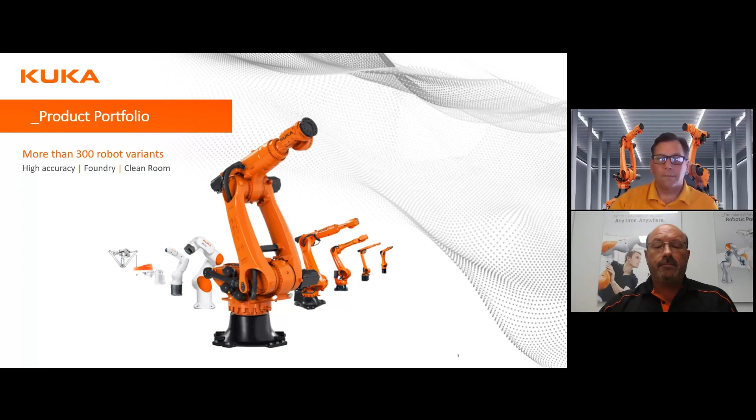In addition to robot arms, auxiliary equipment can be used to help give robots additional reach and flexibility to reorient the parts being worked on. This equipment comes in the form of linear units and rotational positioners. Examples of this equipment will be seen throughout today's webinar, giving you a sense of how it helps expand the functionality of the robot when working with machine tools.

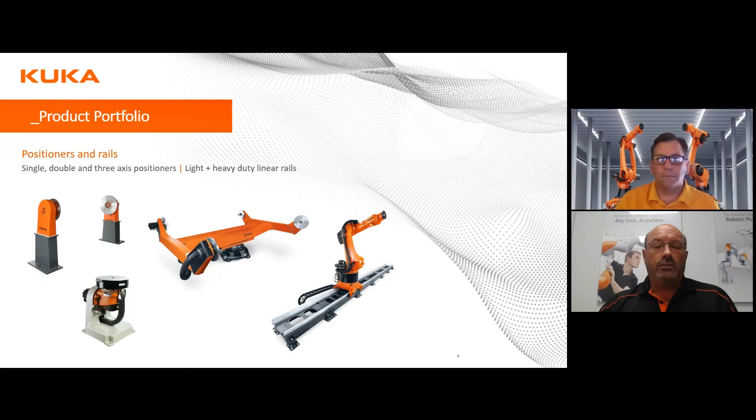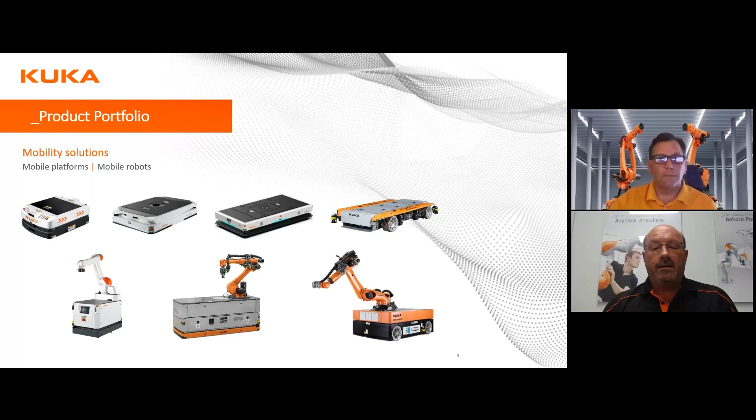Another technology that has really been coming into its own over the past several years is mobility. When it comes to mobility, there are many configurations available in the market today. Mobile solutions from KUKA offer various sizes and payloads to choose from, as well as drive and navigation systems. Moreover, the addition of industrial and collaborative robots on top of these mobile platforms opens up additional use cases to expand the reach and flexibility of automation in the machine shop. Again, you'll see examples of these systems later on.

This brings us to the first of three poll questions for today's webinar. I'll give this some time for everyone to answer. What we're asking is: are you intending to add robotic automation to your machining operations in the next 6 to 12 months?

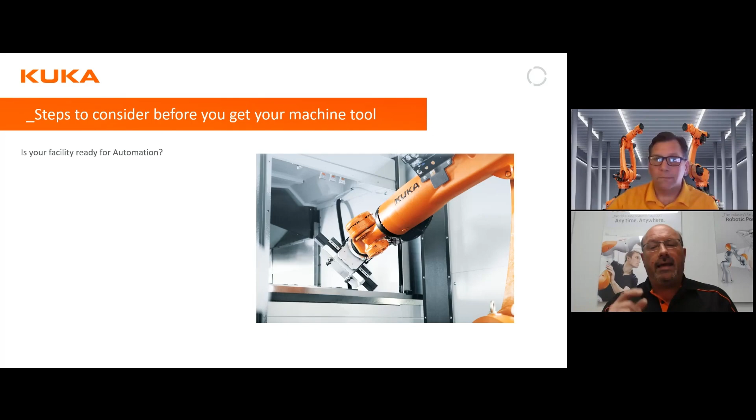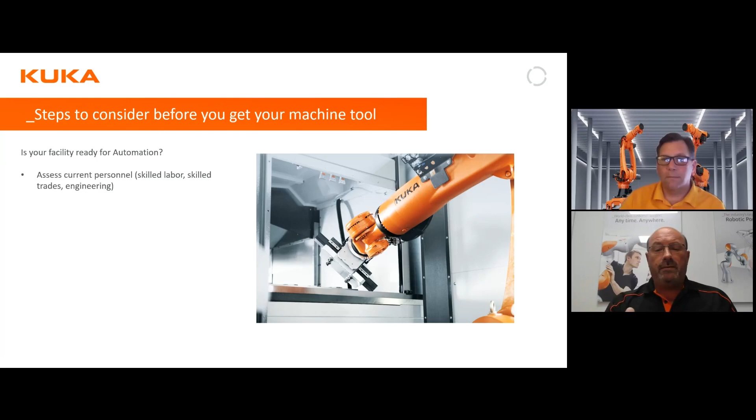Moving along, let's start the discussion around steps to consider before you even get your machine tool, with the question of readiness. Is your facility ready for automation as it applies to your employees? A good place to start is by assessing the current skills of your labor, trades, and engineering teams. Do they have experience working with advanced machinery like robots? This includes jogging and programming the robot, troubleshooting and repairing electrical control equipment, and repairing or replacing mechanical tooling.

This may uncover a skills gap that can be solved with training your existing employees or hiring new employees with the skills needed.

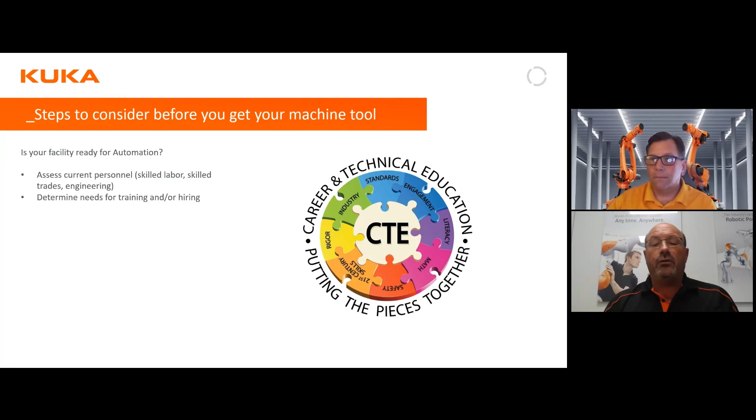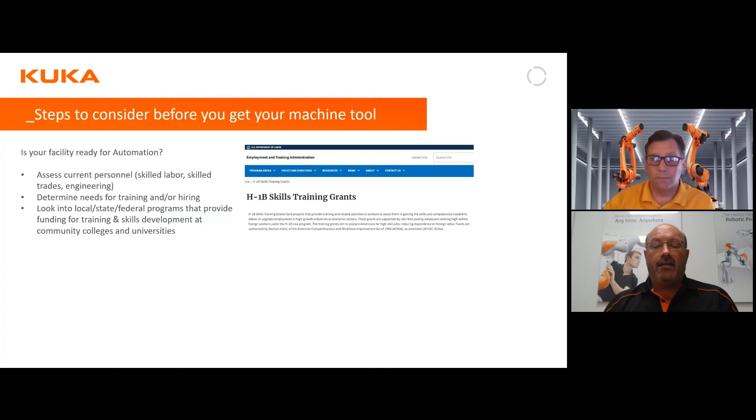When it comes to training, there seems to be no shortage of funds and programs available at the local, state, and federal levels. If you do a quick Google search, you'll see a lot of wins happening for training programs funded by different levels of government. Training programs are offered by both local community colleges and robot OEMs. KUKA offers such training through its KUKA College facilities in Michigan and South Carolina.

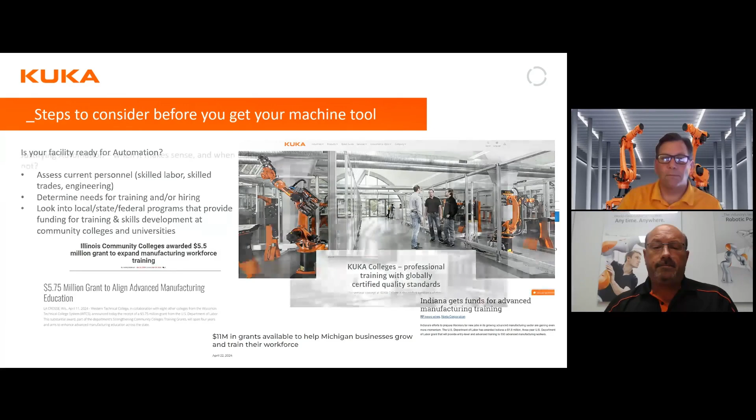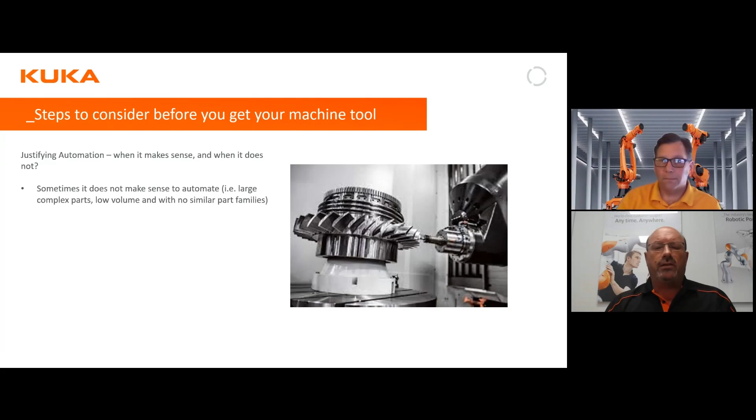As you look at opportunities for automating your new machine tool, it's important to understand not only the total cost of the equipment, but the impact automation has on your operations, and whether it's even appropriate to look at automation. If your parts are large and complex with very long machining times, or have low volumes, or you don't have families of parts that can share the use of the automation equipment, automation probably won't be a wise business decision.

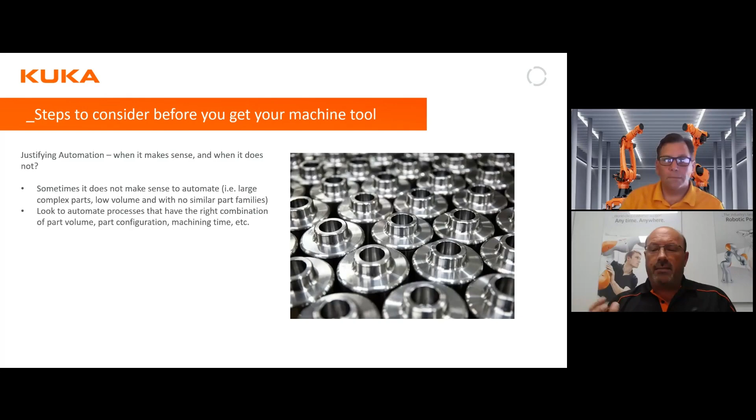If, however, you have parts that have high volumes or families of parts that are generally similar in shape and configuration, and your machine cycle time aligns well with having a robot, automation might be right for you.

So if it's your first time automating, my recommendation is to start off simple. Look for an easy first win—automating parts that are relatively simple to machine, feed, and handle by the robot, overall easy to process. If you take this approach, you may find there's a standard solution in the market that can be readily tailored to your needs. Standard solutions tend to be quicker in terms of delivery, cost competitive, and have value-added software and hardware features developed and honed over several iterations.

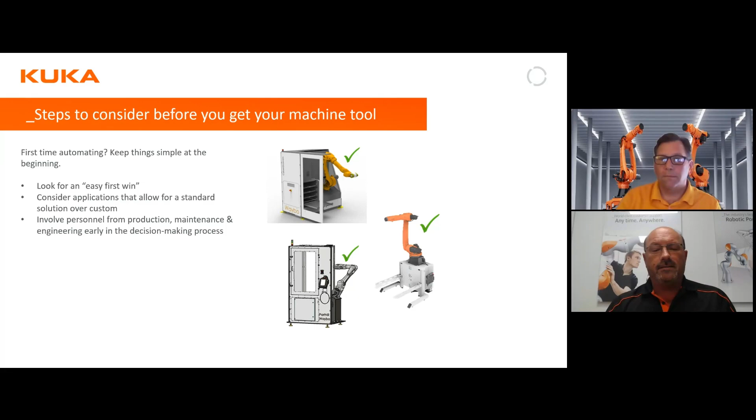A major part of being successful with your automation is to involve your team, the team that will support and maintain the equipment once it's on your floor. Once you have success automating some of the easier applications, you might want to venture into more complex applications like 3D bin picking, if the justification warrants it.

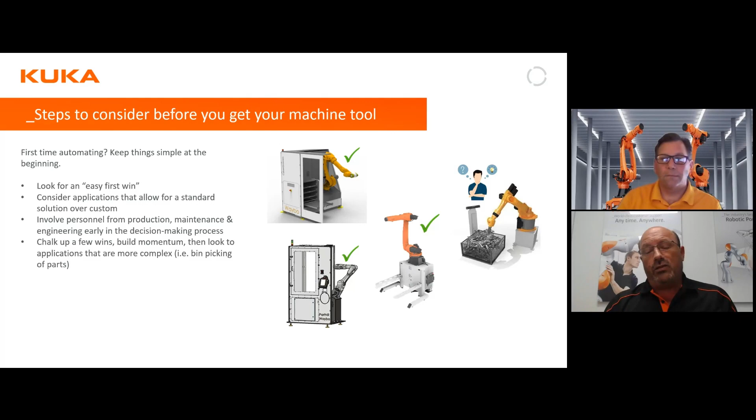So you're moving along in your journey into automating your machine tool and generally understand the financial commitment it will entail. Have you considered other ways to maximize profitability from your automation? Can you put the robot to use on tasks other than loading and unloading the machine tool? Can the robot perform a deburring operation, drill out a simple hole, face mill a non-critical feature, perform some type of inspection, or package the parts?

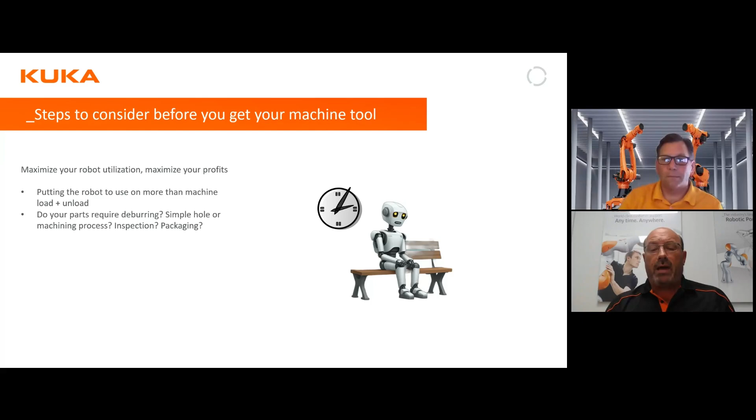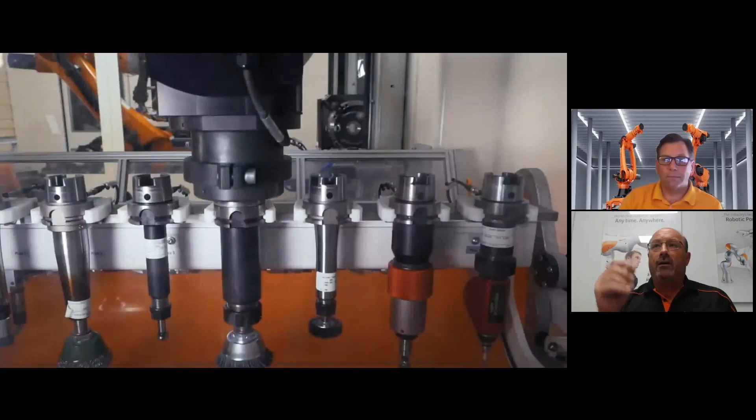This video shows a fairly complex system overall, but you're seeing how the larger robot is putting to use deburring tools to help do some post-processing after the operations. You're actually getting a sneak peek into the manufacturing and machining of castings that go into our very own robots.

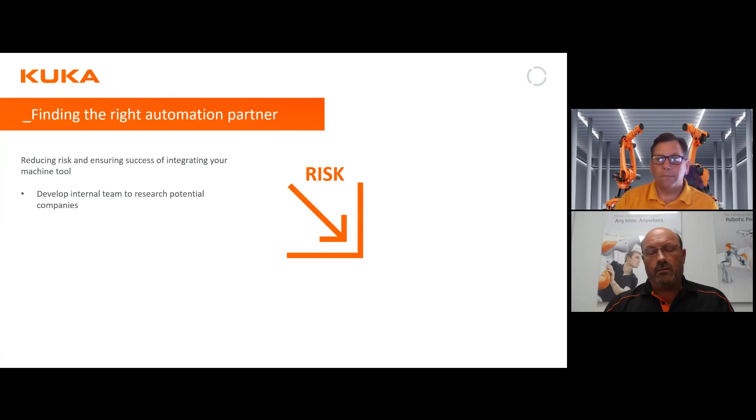Another approach is to work with your robot OEM to help recommend an automation supplier. Companies like KUKA have partner programs that can help you narrow down the field and ensure you're aligned with the correct automation partner. You want to make sure you bring the right project to the right partner.

If the project's $200,000, give or take, a large integrator that typically works on projects at the $3 million level might not be a good match. And if you're looking at automating a multi-robot project with several machining operations, part transfers, inspection stations, it can easily overwhelm a smaller company. So it's really important to engage with the right partner for your specific project.

Another approach is to look for advice from your network in the industry. Find out who's had success with the companies you're researching and learn from their story.

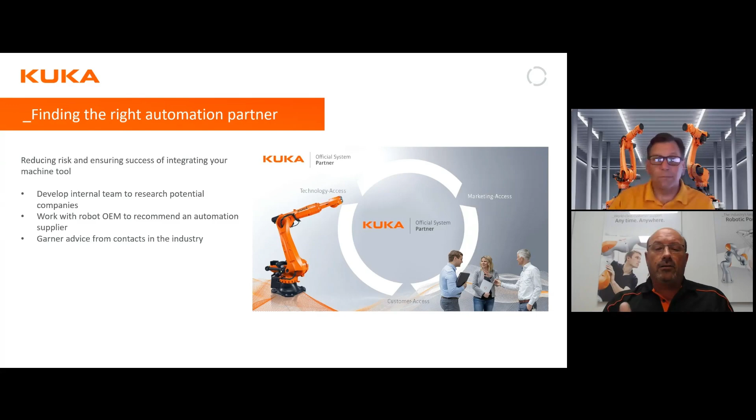So now you have the specifications for your project, and you have a list of potential automation partners. Here are some next steps to take.

My first recommendation is to visit the facility of the automation partner you're considering. This will give you a chance to tour their facilities, meet with their teams, and see how they operate, starting from reception, extending out to the plant floor, and everything in between. Are they well organized? Do they have a good process flow? Do they have a shop full of equipment, or is it waiting for the next project to show up? You'll gain a lot of insight with a visit.

Another visit that will benefit you is to tour a facility that's running a system from your potential automation partner. This will allow you to see firsthand how their equipment operates, how the people at that facility interface with it, and what their feedback is on the equipment that was sold and integrated by that partner. This might not be the easiest to get set up - it's hard to maybe get into the competition - but if you can make it happen, I highly recommend that you do it.

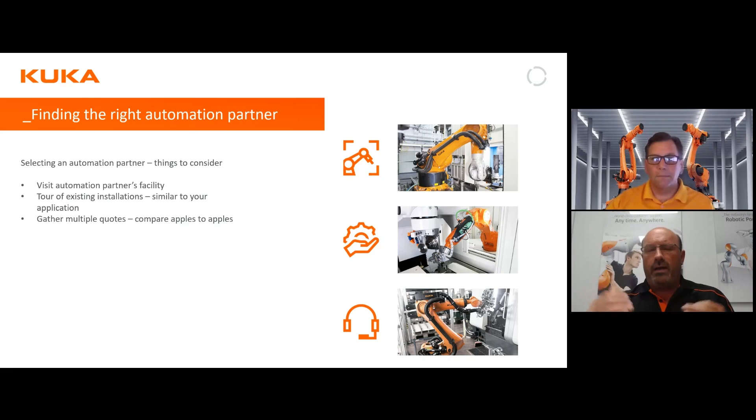So now that you've identified 2 or 3 companies that check all the boxes on your requirements, you've assessed their facilities, you've seen their equipment in action, and provided them with the same specifications and expectations for your automation project, you want to request a few quotes, approach 2 to 3 companies, and ensure you're comparing apples to apples. Make sure all the features in one quotation match pretty much verbatim with the other quotation. That way you can assess based on deliverables, based on pricing, and make an informed decision.

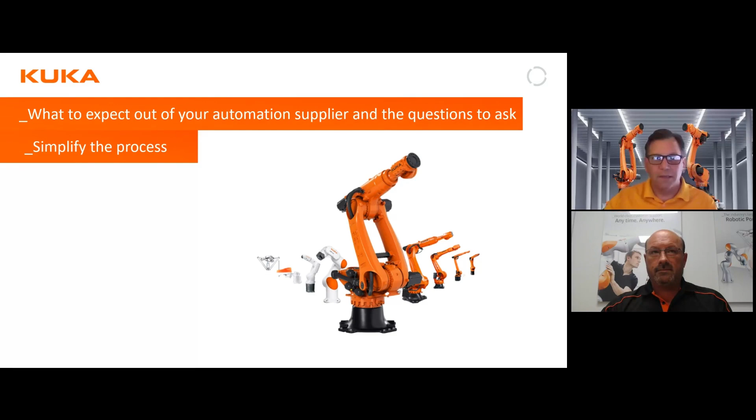Communication issues, the root of all evil and the cause of a lot of issues. Whether it's people or machines, the issues are the same. If you can't exchange information, whether it's bits, bytes, or words, you won't be making any parts.

Field bus networks can definitely reduce your wiring costs for both safety and data networks. The wiring can be as simple as plugging in an Ethernet cable, for example.

You really want to evaluate the cost and lead time of options versus your needs. Sometimes discrete I/O, hardwired connections for data and for safety, could be the most cost effective. For some large projects where you have a lot of wiring and a lot of data exchange, they may be better suited for safety and field bus networks.

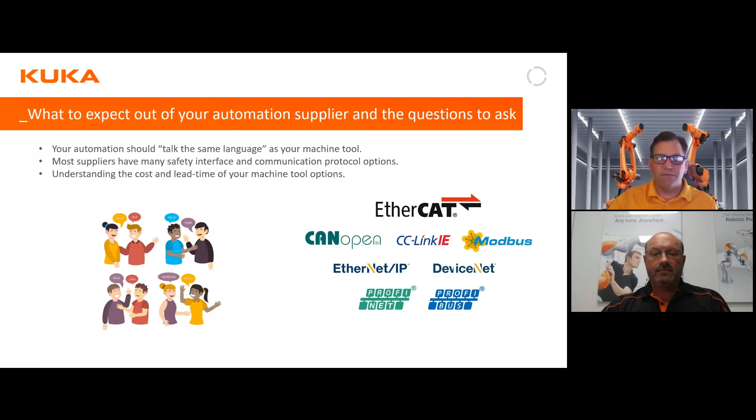I know future production needs aren't always known, but it's always worth having a discussion early on. Adapting tooling and grippers for future parts can definitely save some money, and spending a little money up front can save you a lot of money in the long run.

Sometimes small gripper changes can cost very little, but may allow you to pick up many different types of parts or a family of parts, as an example. A complete new gripper design can be pretty costly after the startup. Another option to give you some flexibility is to add tool changers, so you can quickly change grippers for new parts.

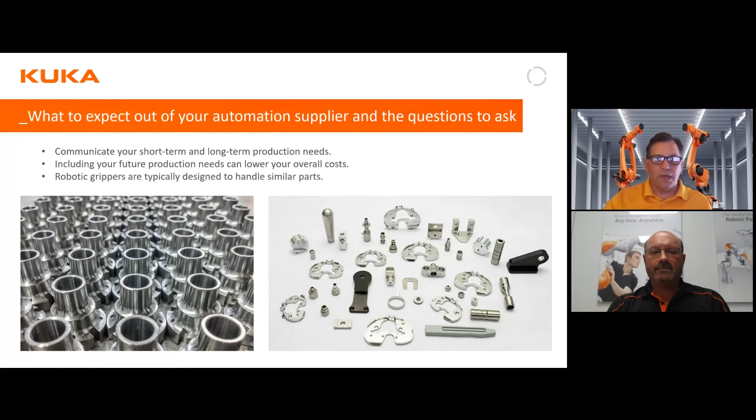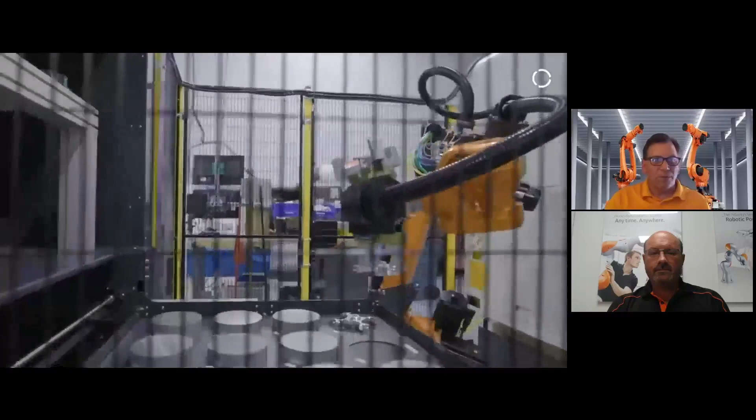Here's an application video. The first one is showing a dual gripper design, and this design will handle both the raw material and the finished parts coming out of your machine tool. So it's a very efficient tool and it saves cycle time.

The second video is going to show a single gripper that can handle different size parts, but they are of similar type or similar part family. This could be a very cost-effective solution if you don't have tight cycle time requirements.

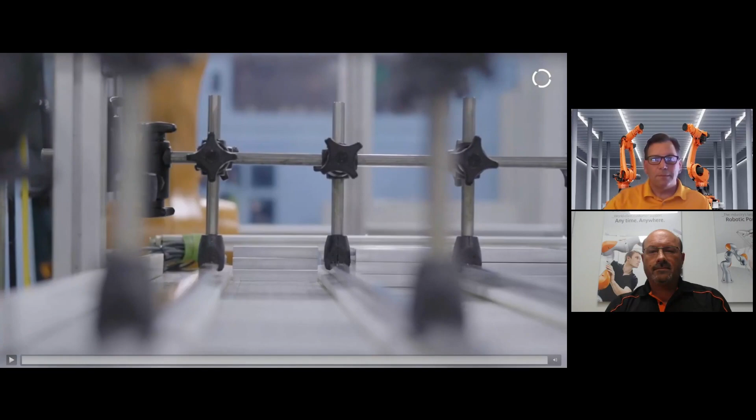Custom automation typically costs 50% more versus standard automation. But of course, every project can be a little different and the cost can vary a lot too.

A standard system is really a pre-engineered solution that requires very little changes to meet your requirements for the project. One of the biggest advantages is it's a proven, tested solution, typically has lower costs since there's no major engineering required, and these systems can be turnkey as cheap as $75,000. The biggest disadvantage is they're really not very flexible and they might not fit your layout.

A custom solution typically handles multiple processes. It can be integrated into your machine tool directly, or it might be part of a large production line. The main advantage is it's a very flexible solution and you get exactly what you need.

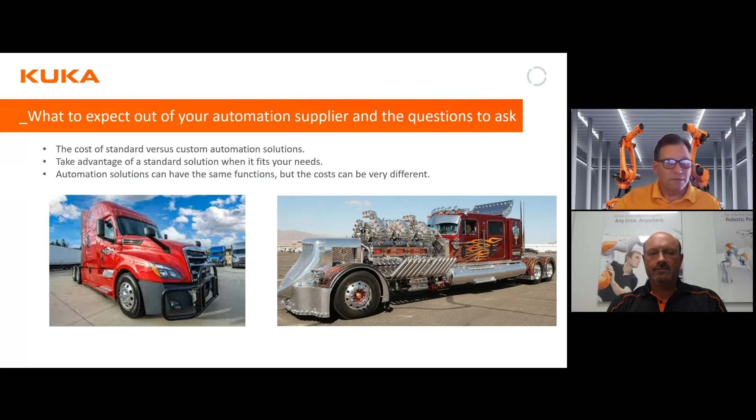You really want to spend your budget when needed, but don't spend your money on the cool stuff that won't help your production. Both of these trucks can really do the same job, but one would obviously cost a lot more than the other. Although I do like the custom truck a lot more.

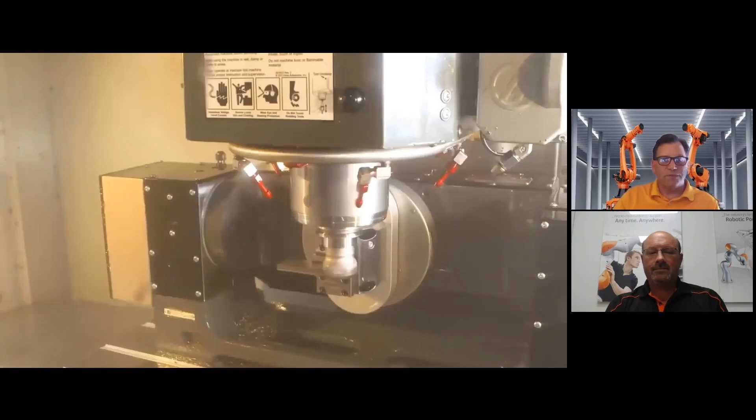Here's an example of a standard system. This again is a pre-engineered solution. It's a very simple approach for both the part handling and the gripper design.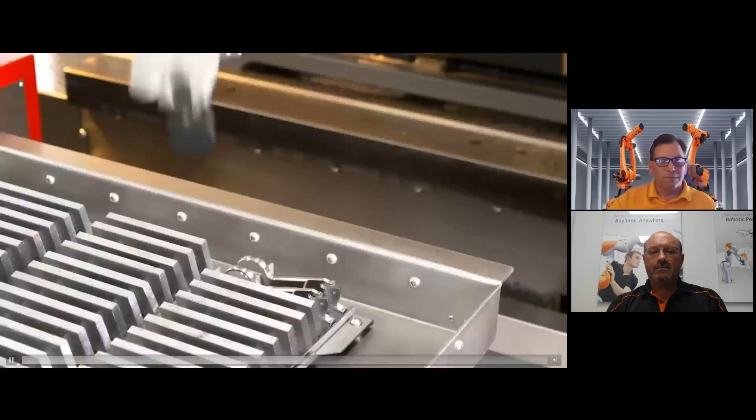The system can be easily retrofitted to an existing machine tool. Again, a very simple design and typically a very quick return on investment. The only custom parts of this system would be the tray handling for your incoming parts, and then the custom gripper or fingers to handle the parts.

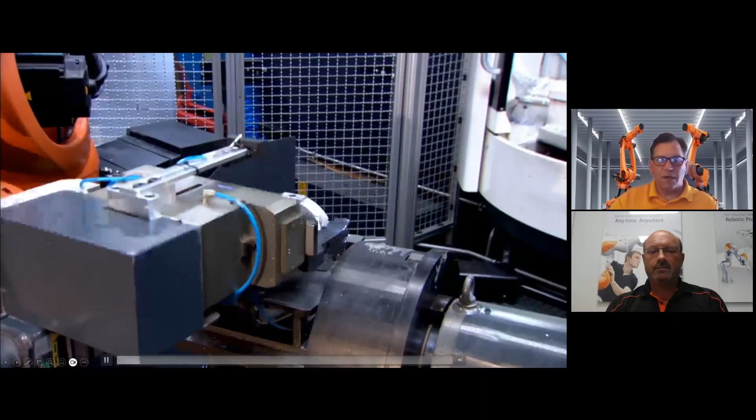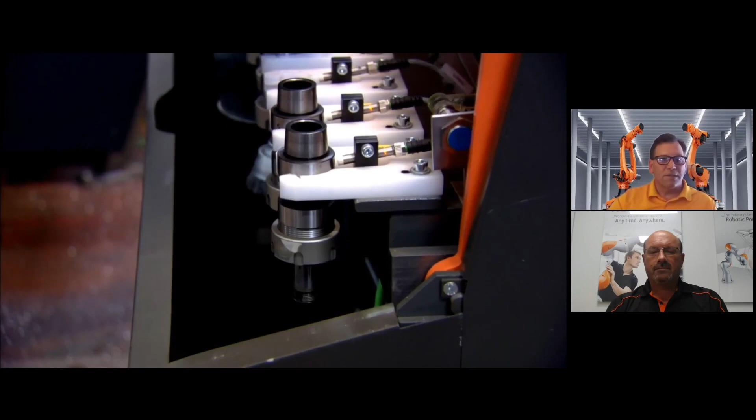Here's an example of a custom solution. This is in our robot production line, as we say, robots making robots. This system was custom built to integrate seamlessly with the machine tool and to handle multiple secondary processes. Robots will never replace a machine tool, but they can certainly complement them and save you money.

Drilling, tapping, milling are all possible for features that don't have tight tolerances. For example, if you're in the range of 10 thou to 20 thou for your part tolerance, that's in the range for robotic processing.

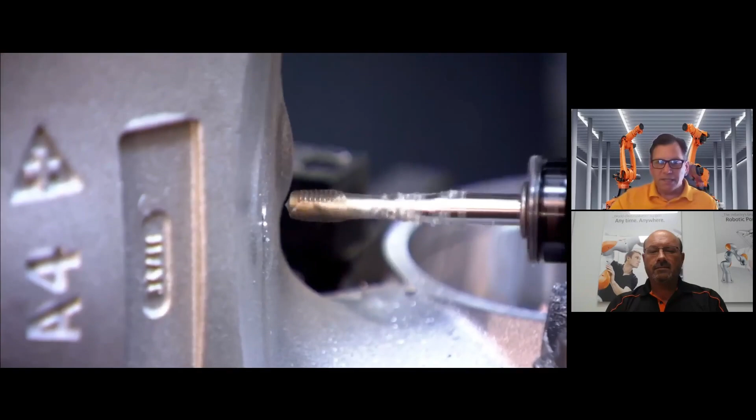There are many different solutions available for handling parts, and the cost can vary a lot. Conveyors, tray systems, vibratory bowl feeders, 2D and 3D vision guided robotics are some examples. Complex parts typically require complex solutions and higher cost feeding systems.

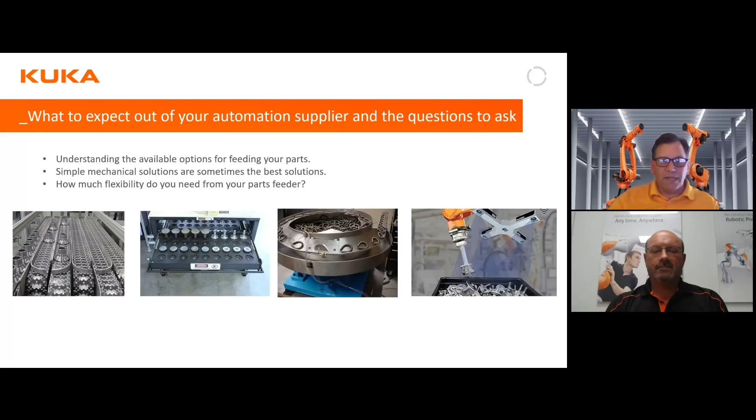Simple mechanical solutions can have a big advantage versus high tech. Keep it simple if possible. Now, 2D or 3D vision is definitely a great option if you really need it. My advice would be to take advantage of the experience of your automation supplier and evaluate all options available.

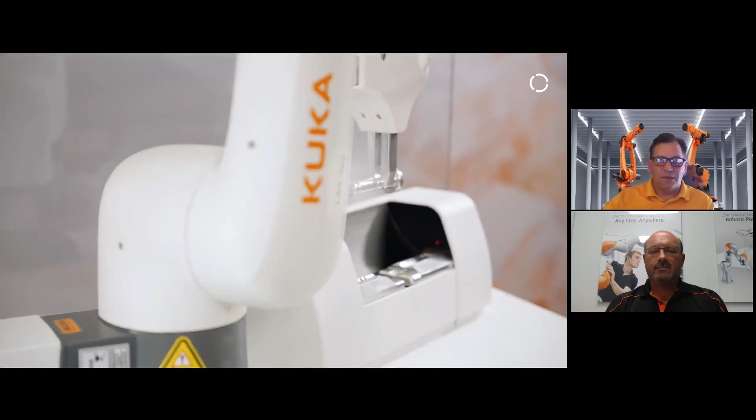Here's an application video. This is showing 3D vision to pick complex parts directly from an unorganized parts bin. This particular application uses a collaborative robot with a dual gripper design.

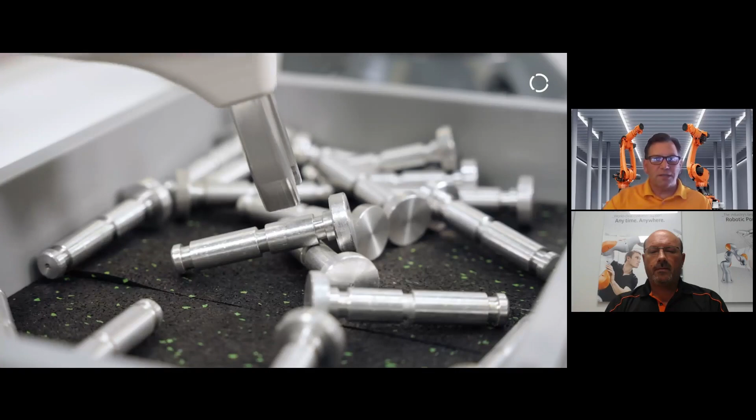These systems are pretty sophisticated. The software can automatically figure out the pick strategy and select a collision-free path to and from the parts bin. You really get a lot more for your money today, and tech suppliers continue to lower the cost and add more features to this technology.

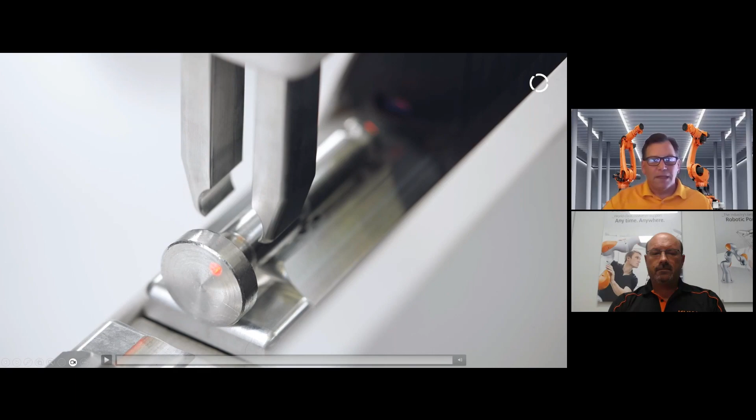As with a lot of industries, AI is quickly becoming a game changer. Sometimes there's no need to train a part. The system can automatically identify a new part and come up with a pick strategy. You want to make sure your automation supplier explains in detail what is needed before making chips and what they expect out of your team.

Identifying critical path, or high-risk tasks, is always important, and it's always good to have a plan B.

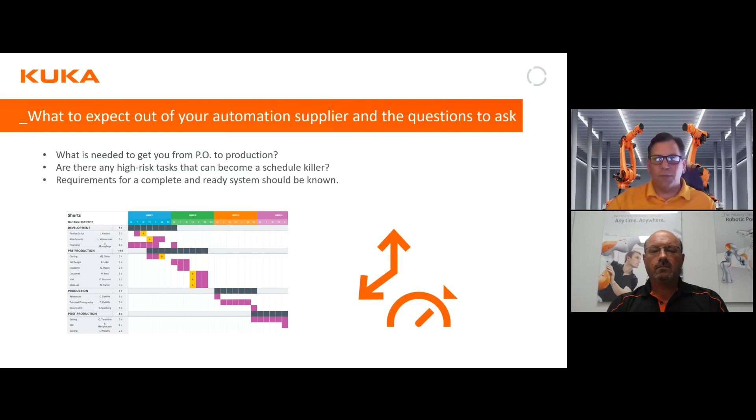FAT, or factory acceptance test, this should really be part of your proposal and agree on it before issuing a PO. It could definitely save you a lot of headaches.

If it's a turnkey system, it may include a complete design, install, training, programming your first parts, for example. Most suppliers are pretty flexible on what they can offer, and the deliverables from your automation suppliers can vary depending on their capabilities and your needs.

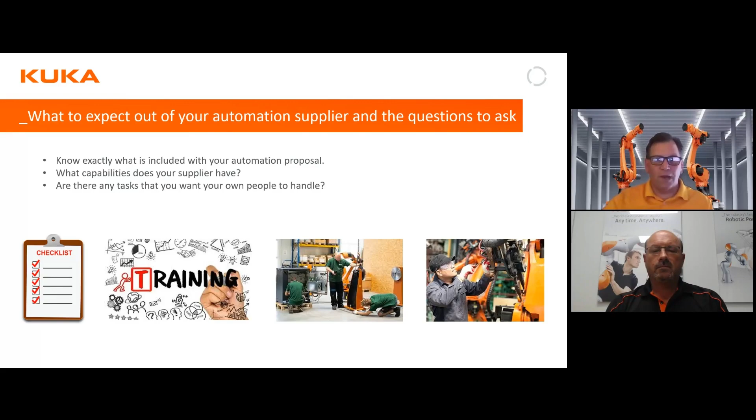The best way to learn a system is actually to help install, start up, and debug the automation. Including your people early on in the process can be critical.

I've seen many projects fail when it really isn't possible to automate 100% of the process. A successful project is really a project that has a good return on investment and you achieve your production needs. The best automation solution is really useless if it doesn't fit your budget.

Sometimes you want to take advantage of your skilled labor if possible. It's still pretty difficult to duplicate what the human hand and eye can do.

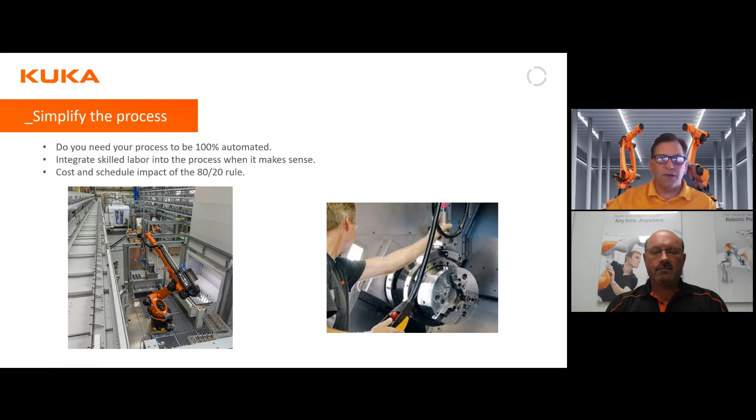The 80-20 rule definitely applies to automation. I've seen many applications where 80% of the tasks are completed with 20% of the budget, and the last 20%, the very difficult tasks, might consume 80% of your budget. So you really want to prioritize your costs versus needs. There are definitely a lot of variables to consider, and every automation project can be a little different.

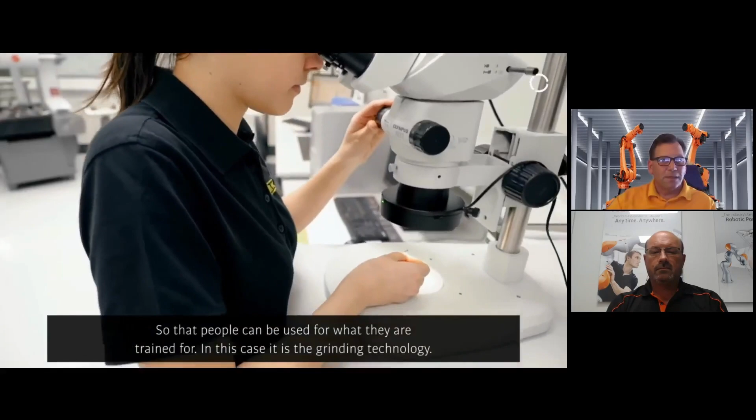Here's an application showing loading and unloading of cutter inserts into a grinding machine. In this case, the robot handles all of the simple tasks that are easy to automate.

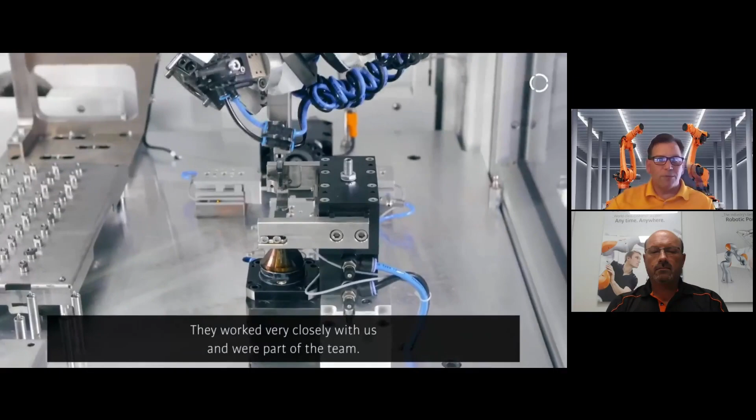I understand there are some really good automated inspection systems out there, but this particular customer determined that a human was needed to inspect the cutters. The reality is, the machine tool and the automation are still making the customer money, so everybody's happy.

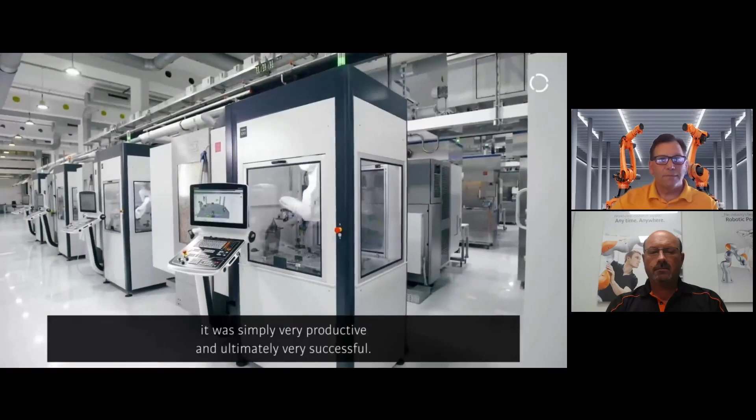We all have struggled with home projects when we don't have the right tools for the job. Typically that's half the battle. And automation is no different. You can save a lot of time and money by matching your needs with the proper technology.

Sometimes it's okay for a supplier to say no. Sorry, we really don't have a solution that fits your needs. Of course, the automation supplier may lose that project, but they might gain a future customer for being upfront and honest. Again, no can be the right answer.

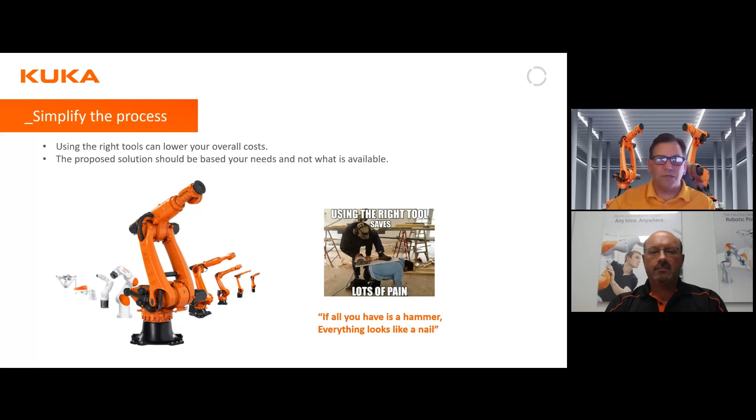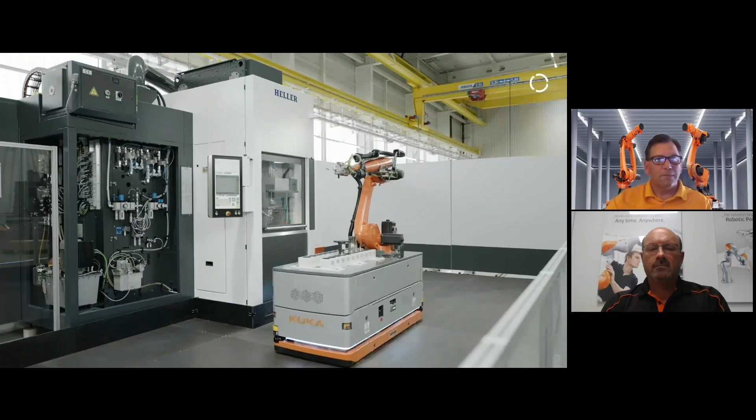Here's an application. This is a mobile robotic solution, loading and unloading cutters into a machine tool. This particular customer wanted no fixed automation in their plant, and they needed the automation to service multiple machines. So a mobile robot system fit the application perfectly.

The system can definitely be costly, but it's a very useful tool when trying to achieve 100% automation for your facility, or if you have some difficult requirements.

Using a collaborative robot doesn't always mean the application is collaborative. The old saying goes, the robot can be completely safe until it picks up a knife. The entire system design should be evaluated and then determine what safety is required to protect your people.

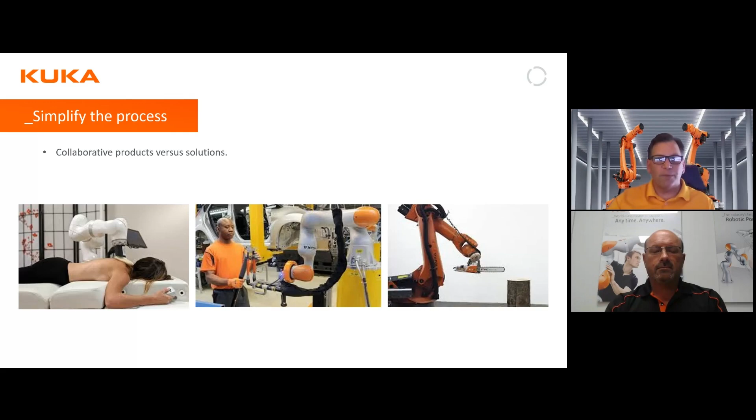Automation suppliers are typically responsible to ensure the safety of the designs, so I would definitely ask for a risk assessment up front to prove the safety of the system. Simple fencing can definitely be a cheap and safe option for protecting your people, as an example.

Add-in sensors for safety can be a good option. Examples are area scanners and light curtains. The cost for this technology has been trending down over the years, and the function and features you're getting are increasing. Unfortunately, the debate between the use of industrial robots versus collaborative won't be ending anytime soon.

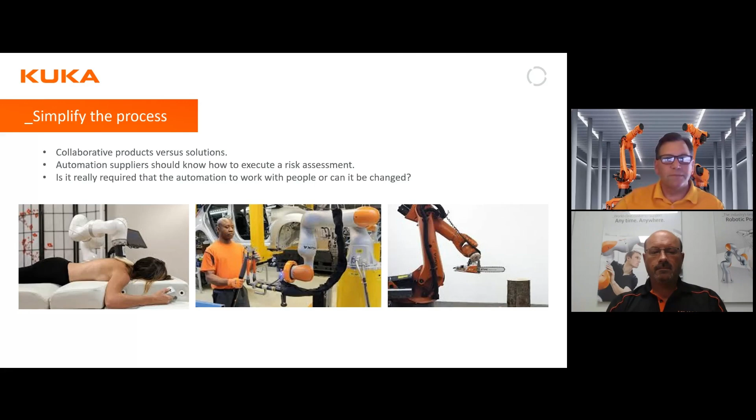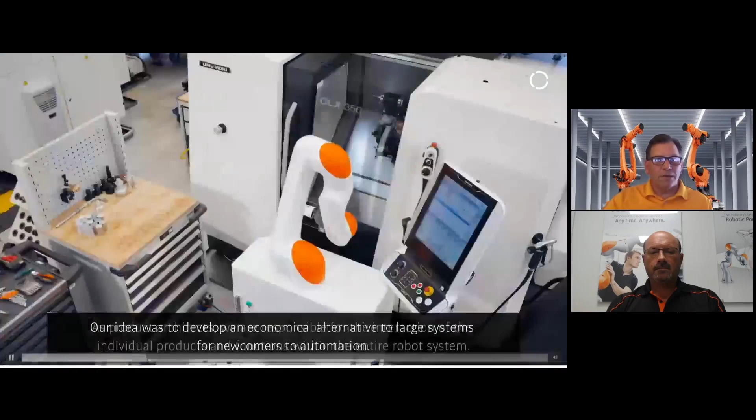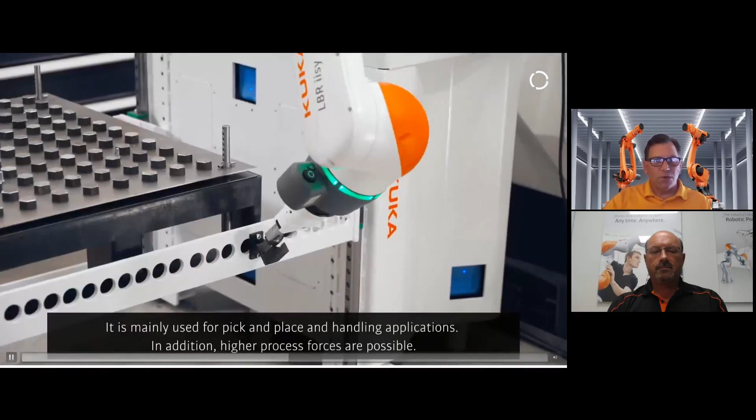Here's a nice example of a standard solution using a collaborative robot to load and unload. This one happens to integrate an AMR, an automated mobile robot. This is a very good example of a true collaborative application. As you can see, there are no heavy, sharp parts that are dangerous. The AMR itself has some built-in safety scanners to protect people when they get too close.

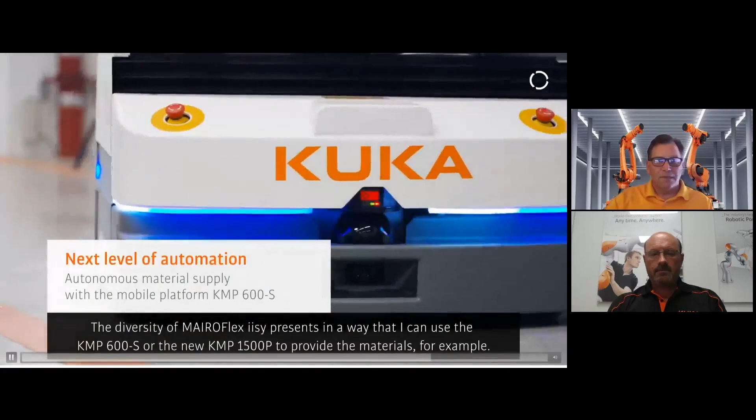It's very typical to have two ranges for the sensors. If someone gets close, it will slow down, not stop your production. But if somebody gets too close, where there's some danger involved, the system would stop.

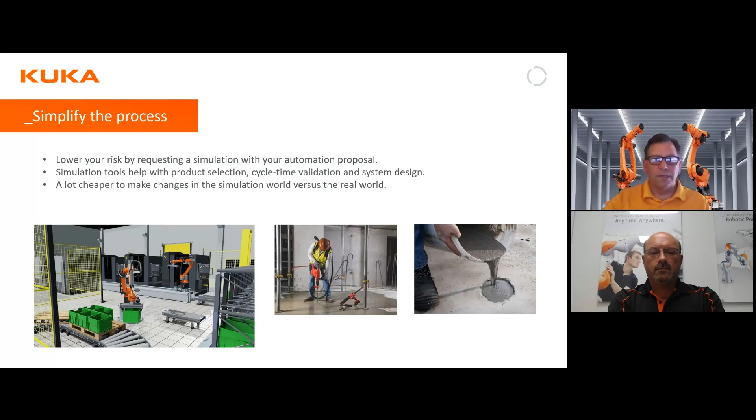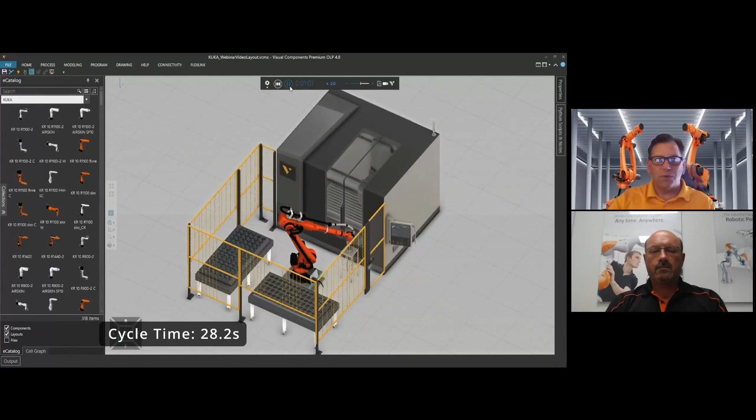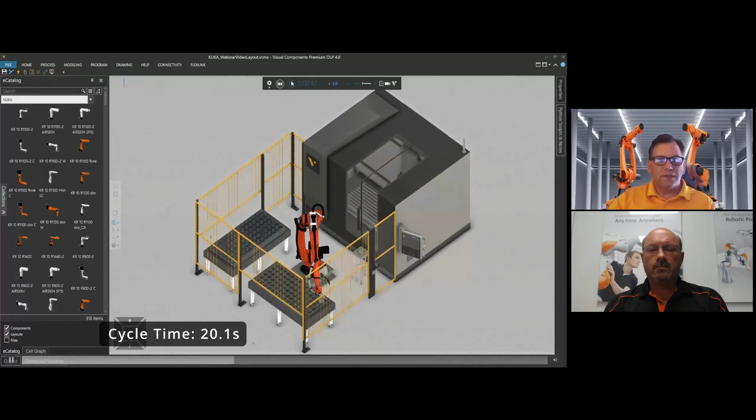The first part of the simulation shows a relatively inefficient process where a single gripper handles both the finished part and the raw materials. This works fine if you don't have any issues with cycle time. The second part of the video shows a dual gripper design, which is definitely a lot more efficient, and you can see the reduction in cycle time.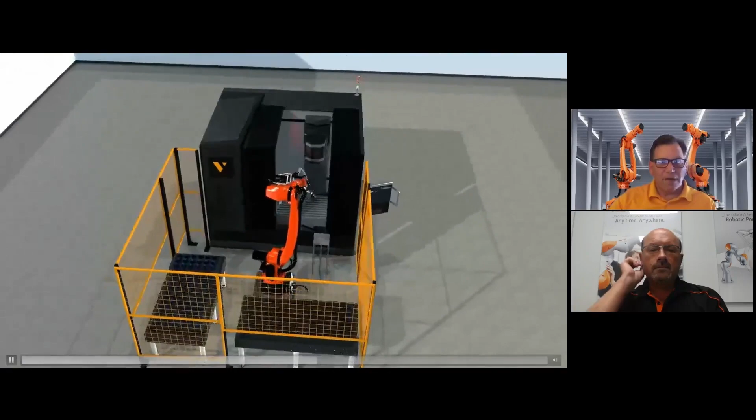One of the big advantages of the simulation is it allows you to try different designs and quickly make changes as needed. The final part of the simulation shows a rendering of the exact setup of what the real machine would look like. You can set up the camera views to show you exactly how the machine will operate in your real production environment.

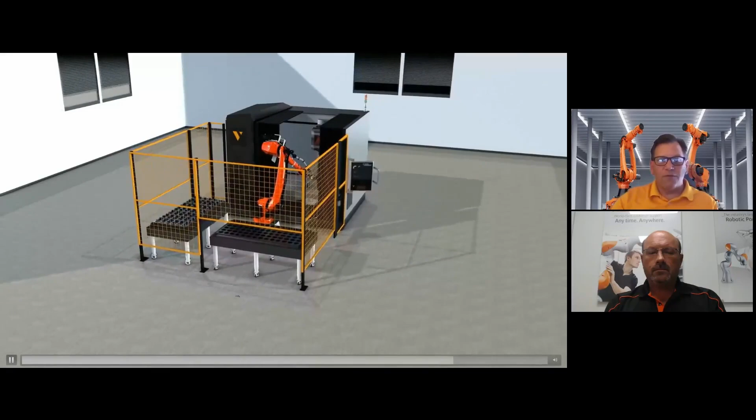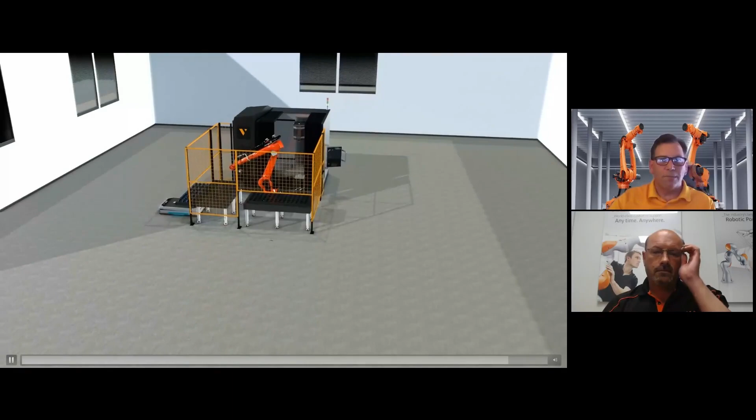Sometimes it's hard to tell the difference between a simulation and a real video. You can also use your simulation to look at the workflow of your material, controlling the inflow of raw material and the outflow of finished parts. In this case, we move the finished goods or the raw materials around your machine shop, so it can show the complete process.